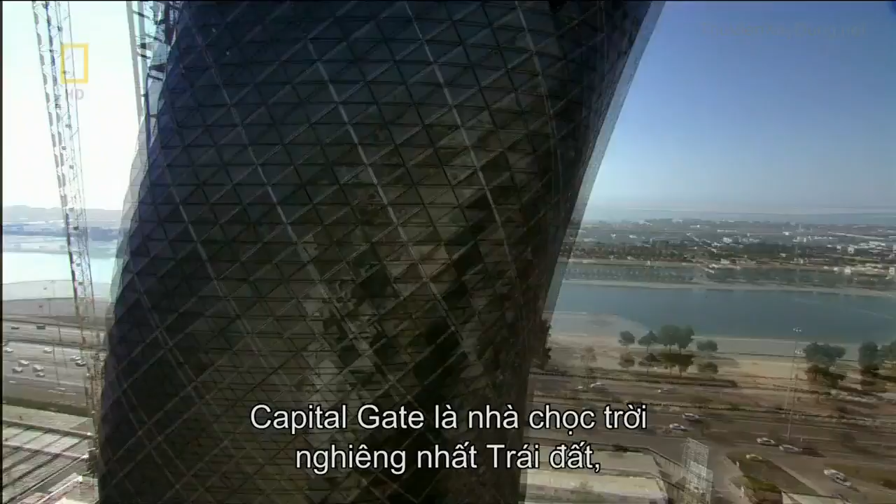Dubai is famous for its audacious engineering projects. But now, its neighboring city, Abu Dhabi, could surpass them all. This is Capital Gate, the most inclined skyscraper on the planet. It defies gravity, leaning at almost 5 times more than Italy's Leaning Tower of Pisa. To make it stand up, it'll take some extraordinary engineering that could rewrite the skyscraper rulebook.

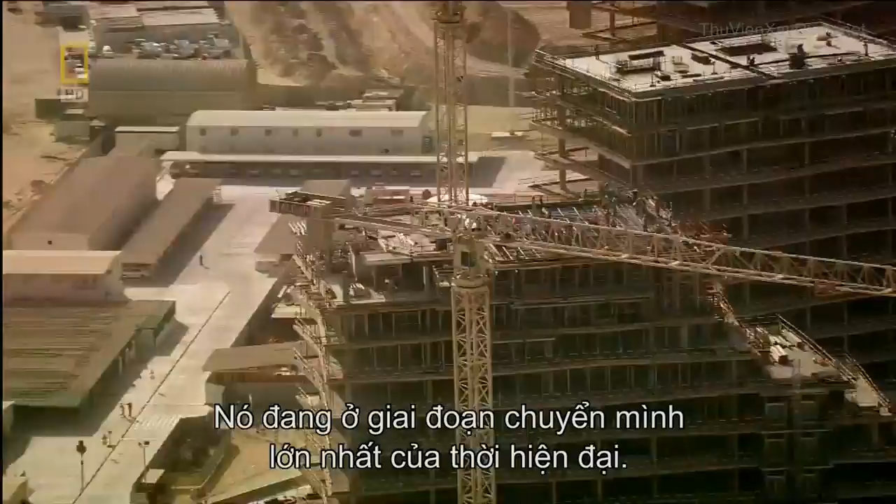Situated on the edge of the Persian Gulf lies the Sheikhdom of Abu Dhabi. It's the largest and richest of 7 states that unified in 1971 to form the United Arab Emirates. Abu Dhabi is undergoing one of the biggest makeovers of modern times. Its ruler, Sheikh Khalifa bin Zayed Al Nahyan, wants to join the City Super League. And he's spending over $200 billion to transform his capital into a world-class business and tourist destination.

He's already spent a reputed $3 billion creating the most expensive hotel ever built. The Emirates Palace boasts 114 gold domes and is the height of luxury, where rooms cost up to $12,000 a night. And that's not all. He's built one of the largest and most opulent mosques on earth. Capable of accommodating 40,000 worshippers, the Grand Mosque boasts the largest carpet on the planet and the world's biggest gem-encrusted chandelier. But even these structures have not quenched his thirst for the extraordinary.

Now, the Sheikh wants a building so spectacular it will instantly become an international symbol for Abu Dhabi. The man appointed with the task of delivering this architectural icon is the Sheikh's cousin, His Highness Sheikh Sultan bin Tahnoon Al Nahyan. Architecturally, it will be a unique building, positioning Abu Dhabi as one of the cultural hubs around the world. And architecture is part of that overall inspiration and art.

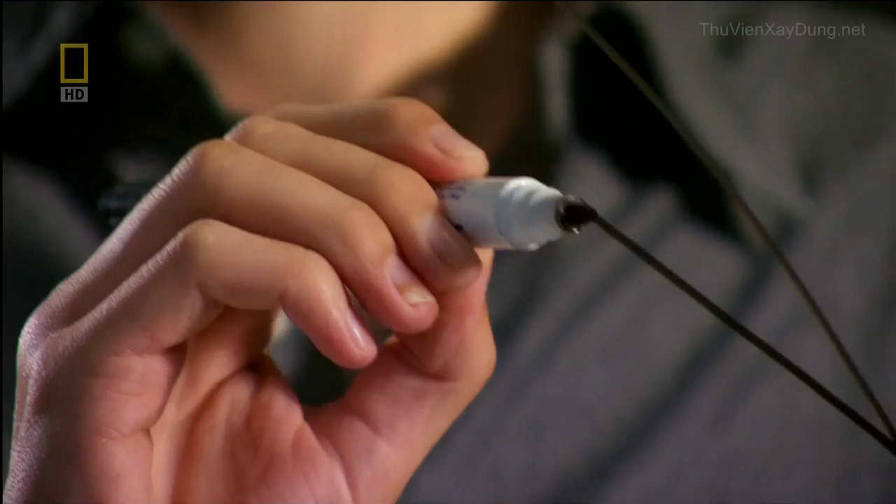The architects look for inspiration in Abu Dhabi's landscape. They find it in the wind-swept dunes and the rolling waves of the Persian Gulf. We took this idea of wind and water, which are both dynamic, fluid type of rhythms of nature, and we said, how can we capture those in time? As a result, you get a much smoother face. I was really very happy when we first saw it, because with such a building, you get the first impression from the first few seconds.

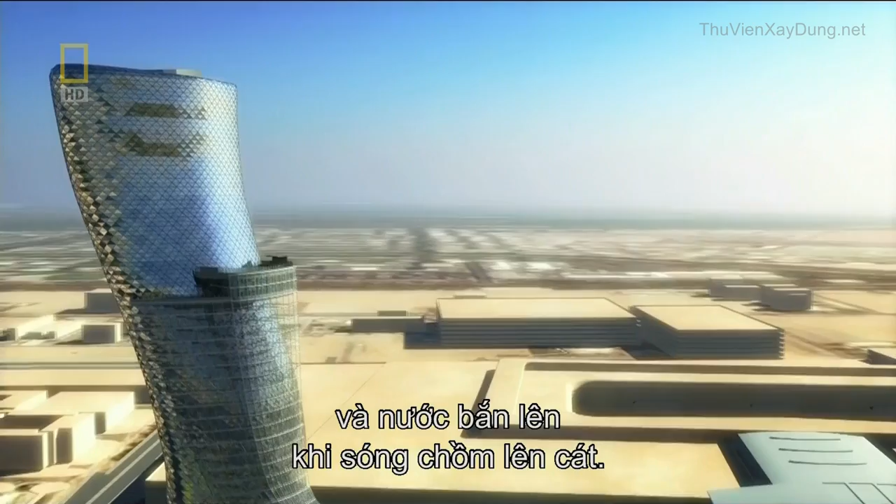The team come up with an extraordinary design. A tower that spirals out of the ground to 160 meters, inspired by a desert whirlwind and the splash of a wave rising over the sand. This gravity-defying skyscraper tilts almost 5 times more than Italy's Leaning Tower of Pisa. No single angle of this tower is the same as another. It's a structure guaranteed to amaze.

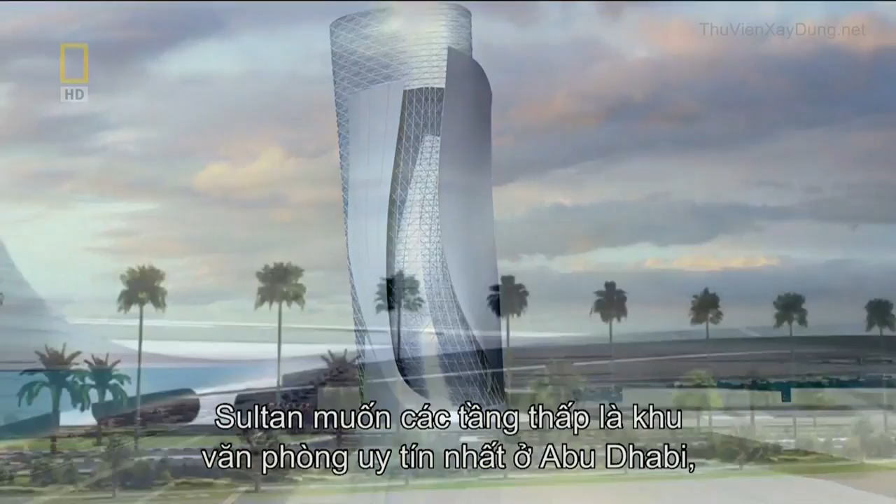We really wanted this to happen. They could see a vision suddenly. They could see something that would stand for them. Then there was no stopping us. Sheikh Sultan wants the lower floors to become the most prestigious office address in Abu Dhabi, with the top 18 levels assigned as a 5-star hotel fit for royalty.

But for maximum impact, this landmark skyscraper also needs a prestigious location. The Sheikh decides the tower will stand next to a monument of national importance, the Grandstand. Built by his uncle and founding father of the United Arab Emirates, Sheikh Zayed, it's used to this day for national celebrations. This monument and the skyscraper will link Abu Dhabi's future with its past.

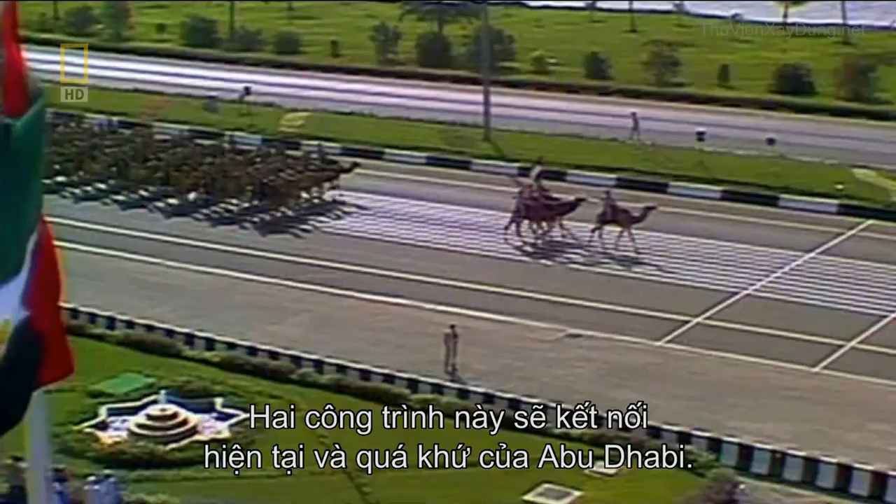Over the past 50 years, this land has experienced extreme change like no other. The discovery of huge oil reserves in 1958 set the wheels of progress in motion. Abu Dhabi's ruler, Sheikh Zayed, had a vision to unify the sheikhdoms and secure their financial future from Western dominance. He then set about using his black gold to create a city that rose out of the desert.

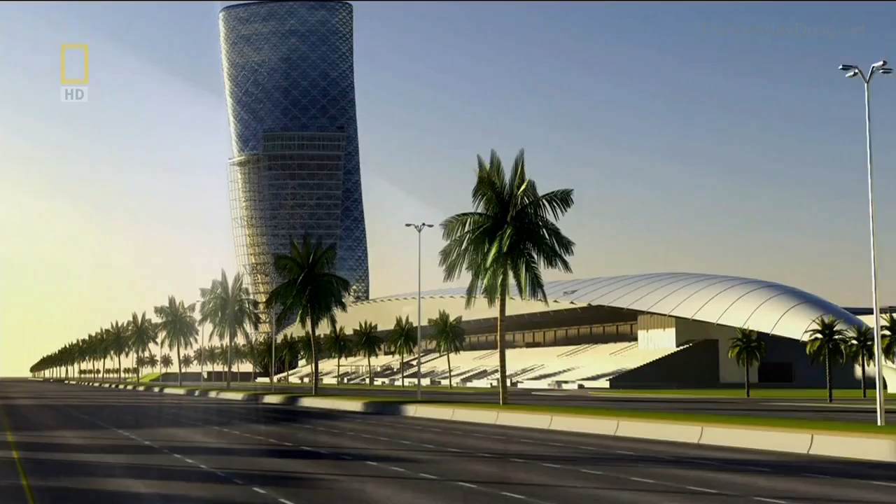Today, Zayed's legacy is all around, and now his son wants to leave one of his own. To transform Abu Dhabi once again, but this time to put it on the world map. Sheikh Khalifa plans a new $2 billion business district called the Capital Center, situated alongside the Middle East's largest business hub, the Abu Dhabi National Exhibition Center. It's the ideal location for an architectural icon. And inspired by its location, the new tower is named Capital Gate.

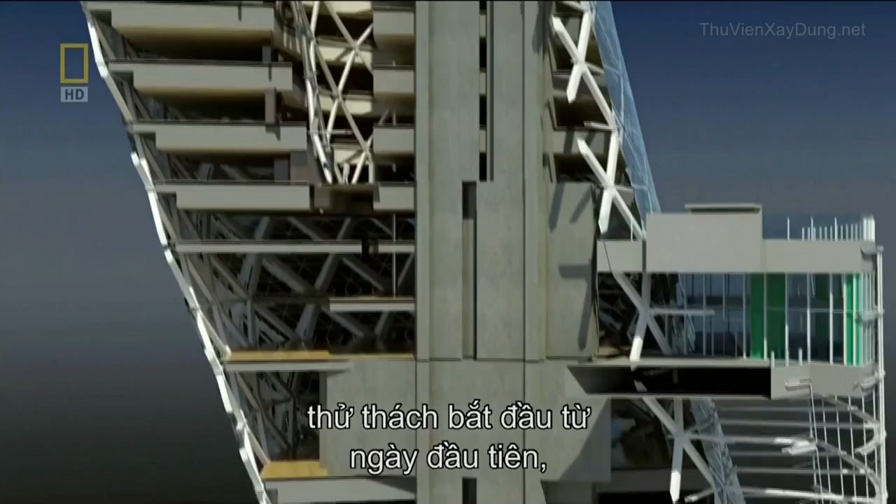Now, the idea must make the leap from the drawing board to the construction site. The only problem is, no one has ever attempted a skyscraper like this before. Everyone realized that this is a crazy structure to build, and how are we going to build it? To make Capital Gate's gravity-defying design a reality, it'll take some extraordinary engineering, and the challenge begins on day one. Its top floors overhang its base by 33 meters, creating huge forces that want to rip the building's foundations out of the ground.

At the construction site, project architect Tony Archibald is daunted by the task ahead. When I first joined the job, I was shown the drawings, and I kind of did a double take, and I wasn't quite sure that I got the correct understanding of the project, and it took me a few moments before I realized what we were about to undertake.

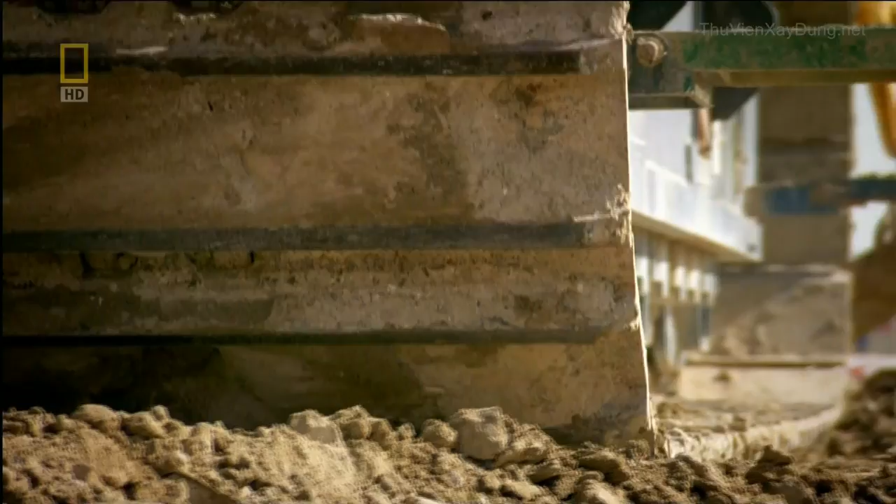Keeping Capital Gate upright is a huge engineering challenge. There isn't just one solution. To overcome the forces of gravity, it will take a whole range of pioneering techniques. But the task starts with the foundations, deep underground. On one side of the building, the weight is going down into the ground. On the other side, it's being lifted out of the ground. And that's due to the large overhang that we're having to deal with.

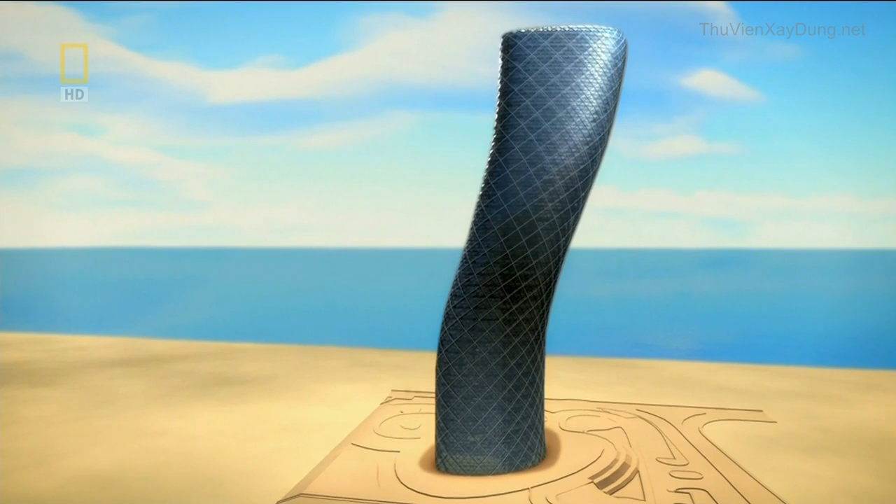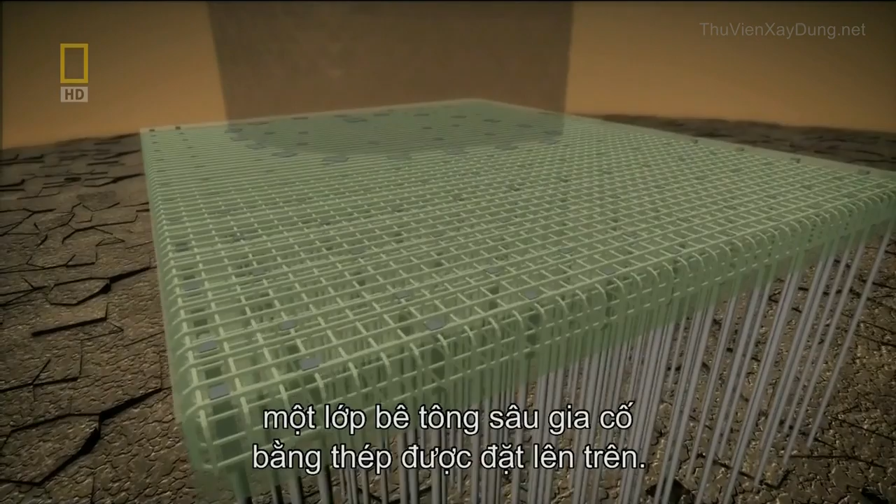The solution requires almost 400 concrete piles that work in 2 different ways. On the leaning side, half of the piles push the overhang's forces into the ground. On the opposite side, the remaining piles anchor deeper into the bedrock. They resist the stretching forces, trying to wrench the building out of the ground. Finally, to evenly distribute Capital Gate's forces into the piles, a deep concrete slab reinforced with steel is laid on top. What the foundations taught us is that every single aspect of this building has to be custom engineered.

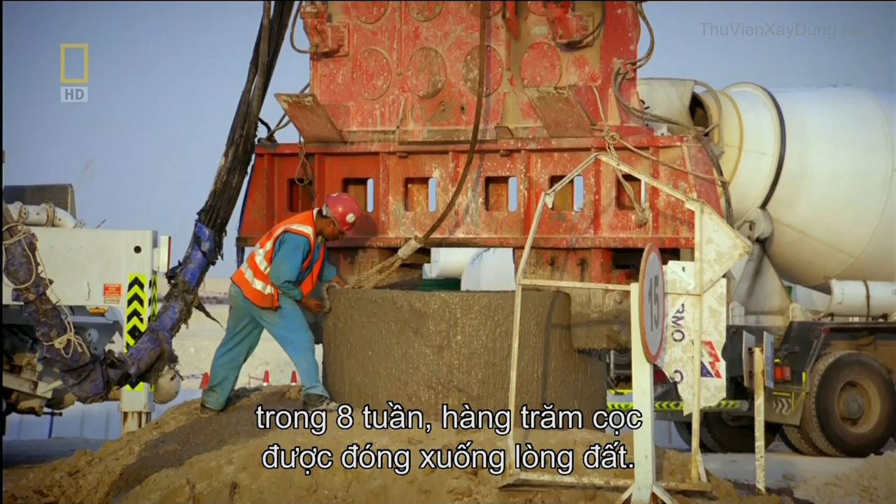Excavators dig out a colossal 6,000 cubic meters of sand. And over 8 weeks, hundreds of piles are driven into the ground. We had an awful lot of piles to put in very close proximity. It was a real difficult challenge. There can be no let-up on this schedule. Sheikh Sultan wants Capital Gate complete by an impossibly tight deadline.

In less than 2 years' time, Abu Dhabi will host the World Future Energy Summit. Over 3,000 delegates from 50 countries and the world's press will convene at the neighboring Abu Dhabi National Exhibition Centre. It's the perfect opportunity to showcase Capital Gate and prove Abu Dhabi is at the forefront of innovation. They'd have to finish by then. But this gives the team just 24 months to design and build a unique skyscraper.

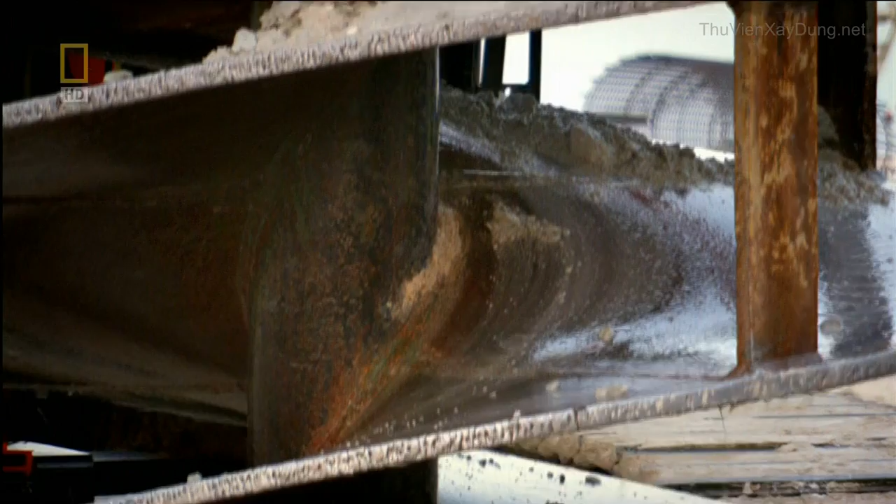With the foundations finished, building above ground can begin. But because of the dramatic lean, it will have to be constructed in a very different way to a conventional skyscraper. We realised once we'd done the foundations that this was going to be the first of many difficult problems. A normal skyscraper requires a solid core to hold it upright. But Capital Gate's curves will just crack and topple a standard core. Engineers must discard conventional thinking and devise a way to defy gravity.

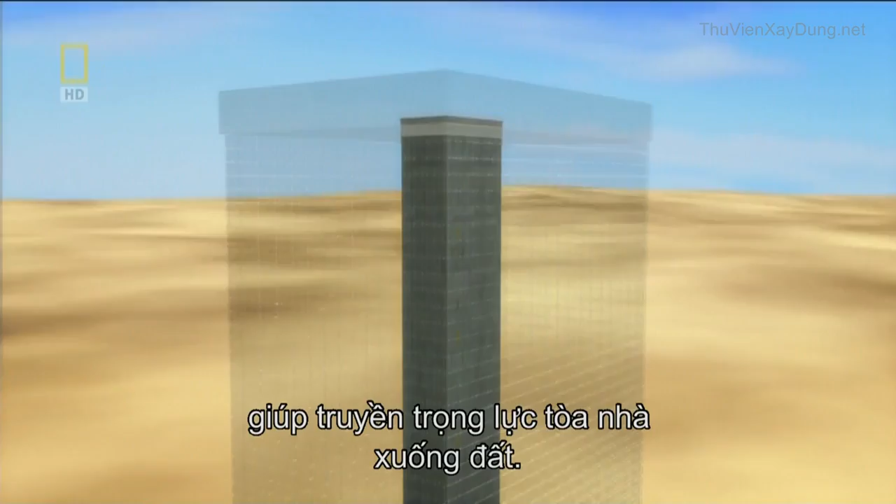Inspired by the nearby desert landscape and its wind-shaped dunes, architects have designed a curved leaning tower. But it'll take some audacious engineering to stop Capital Gate from falling over. Normal skyscrapers are built around a straight vertical core, which helps to channel the building's weight into the ground. There's so much overhang on this building that a conventional core, there was no way it was going to work. You just can't build a straight core. It's just not strong enough. Capital Gate's design would cause a conventional core to bend dangerously. The pull of the massive overhang wants to stretch the core on one side, causing the concrete to tear apart.

Structural engineer Mona Vassi knows it's a serious problem that must be solved. When I saw this one, I thought it's impossible, it's not going to work. It's just some sketch, somebody left it somewhere. But I always think that for the architects, it's easier for them to just draw something, but it's not easy for us to fulfill or satisfy their need.

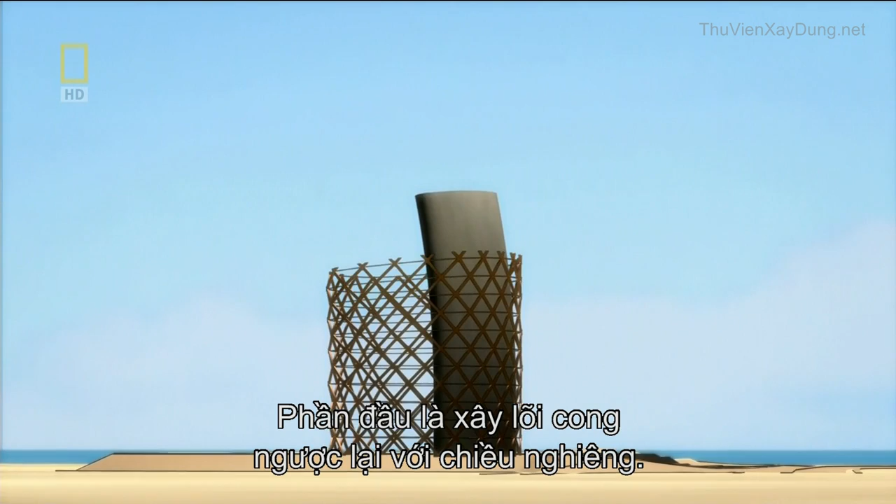The engineers developed 2 groundbreaking solutions. The first part of their plan is to build the core with a curve, bending in the opposite direction to the building's lean. As the structure grows, its weight pulls the core straight. In total, it shifts 350 millimeters, and the effect is significant. The concrete that would have been stretched by the overhang's pull will now be compressed and strengthened. You build it bent, and then as you add the slabs to the upper levels, it pulls it back into vertical. So basically that whole vertical core is in compression, and that gives it immense strength.

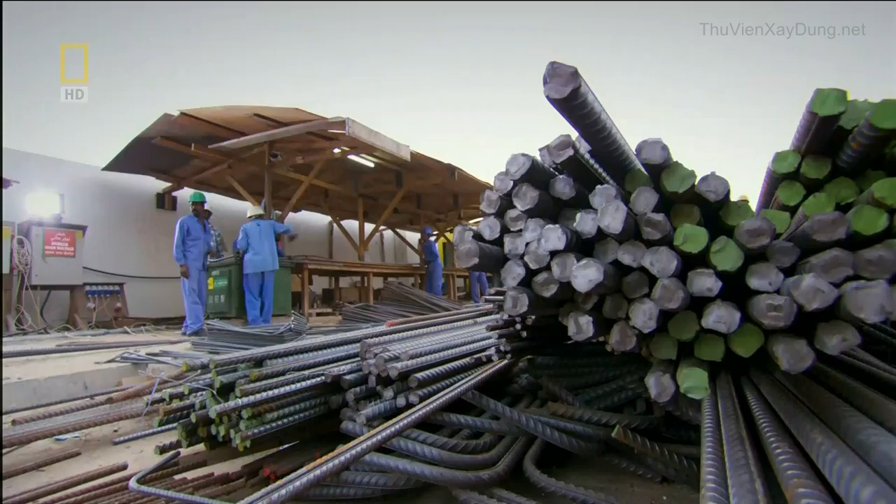The core grows 4 meters a week, and construction manager Les Fairchild is in charge of building it. This is probably the most complex core that I've come across. It's built at an angle, and effectively the core holds the whole building up.

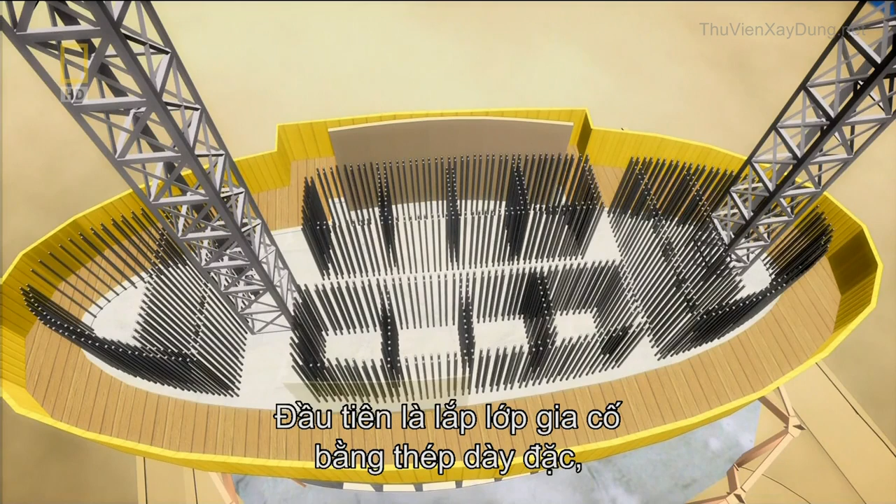The core is built using a technique called jump forming. First, a dense mesh of steel reinforcement is assembled. A mold then closes around the steel to form the shape of the core. The steel mesh is then filled with concrete. Then the mold or form can climb up the core wall for the process to start all over again.

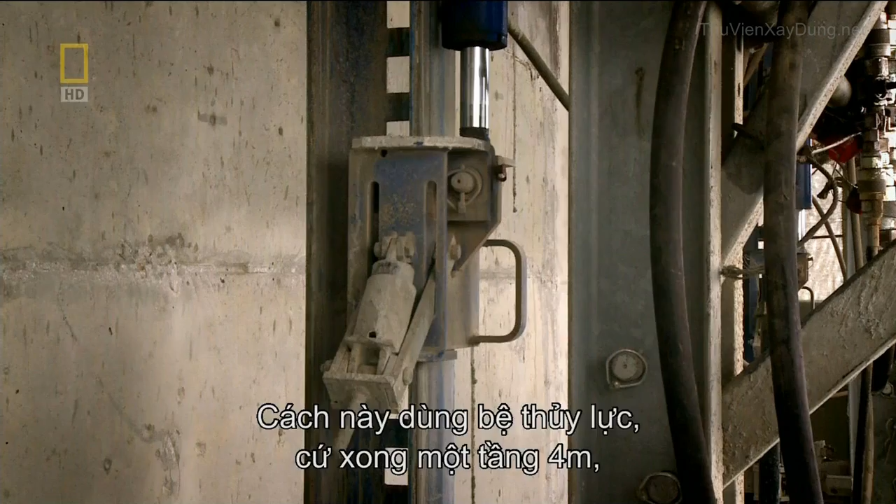Jump form is a hydraulic platform. Once we've cast each 4-metre level, we simply attach it to some runners and we jump it hydraulically up to the next level. The core will be strengthened as it straightens. But for the core to carry extreme loads, the concrete must be reinforced using steel rods called rebar.

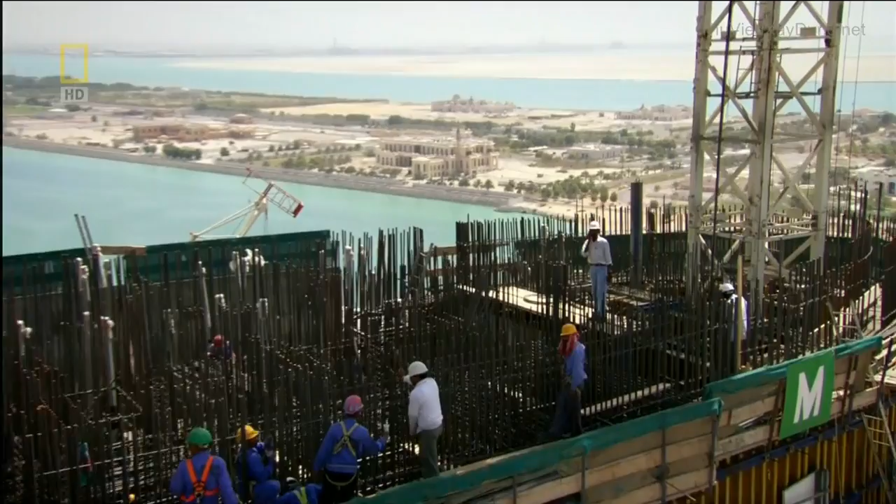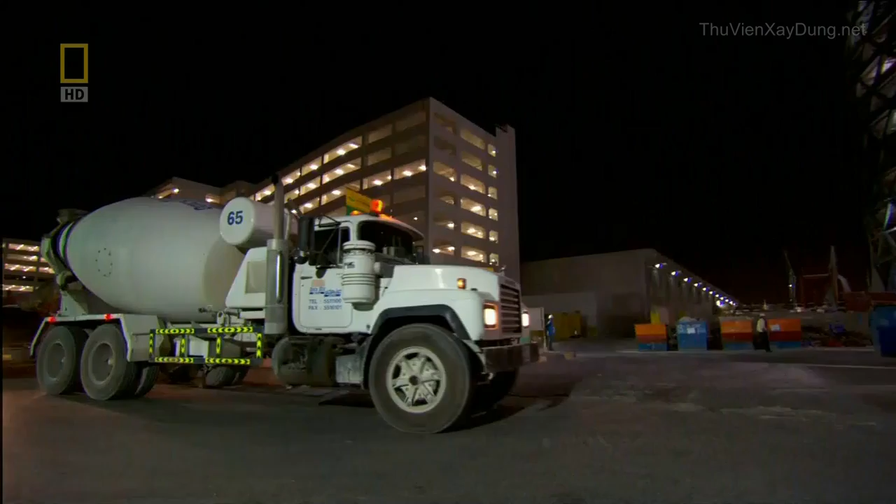The rebar is installed during the daytime, but temperatures of up to 50 degrees Celsius and concrete don't mix. It dries too fast and could crack. To set at the right speed, the concrete has to be poured during the cool of the night. As the core grows higher, the liquid concrete has to be pumped over longer and longer distances. So the consistency of every batch is first checked in a slump test to ensure it won't block the pipes.

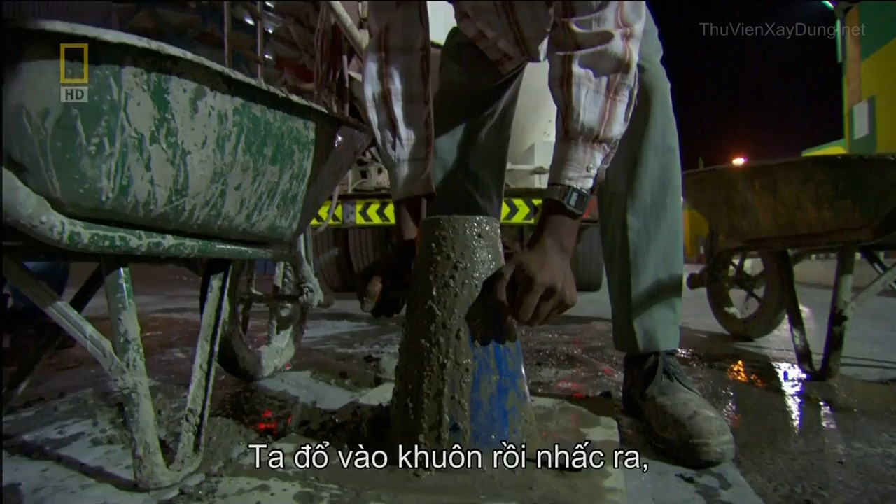When you first see it coming out the wagon, you can usually tell whether it's a tight mix or whether it's a loose mix, and that's what we're testing for really in the slump test. We simply make a cone, lift the cone off, and depending on how much it reduces in height, tells you exactly what the slump is. The one we just witnessed is 215 millimetres, which is within the specification, so that's good to go.

Whilst the truck drives to the pump, Fairchild needs to get onto the core. He can take the stairs, but 90 metres up is a long climb. He knows a much faster way. Crane lift.

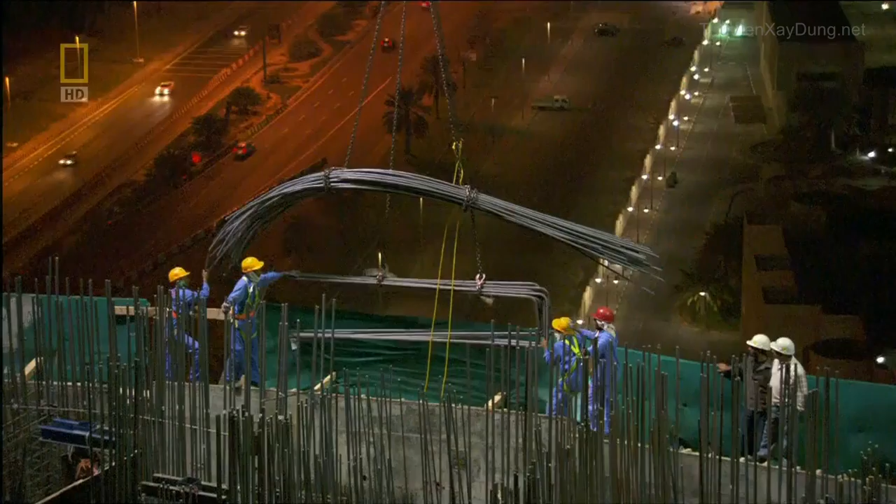It's going fairly well. We've had a nice continuous supply of concrete and we're now pumping it up to the upper levels of the building. And the lads are just steadily working away. They actually work from one side to the other in metre deep layers, so they're doing everything right. It's always exciting when we pour concrete. It means it's another achievement really. We're going up another level.

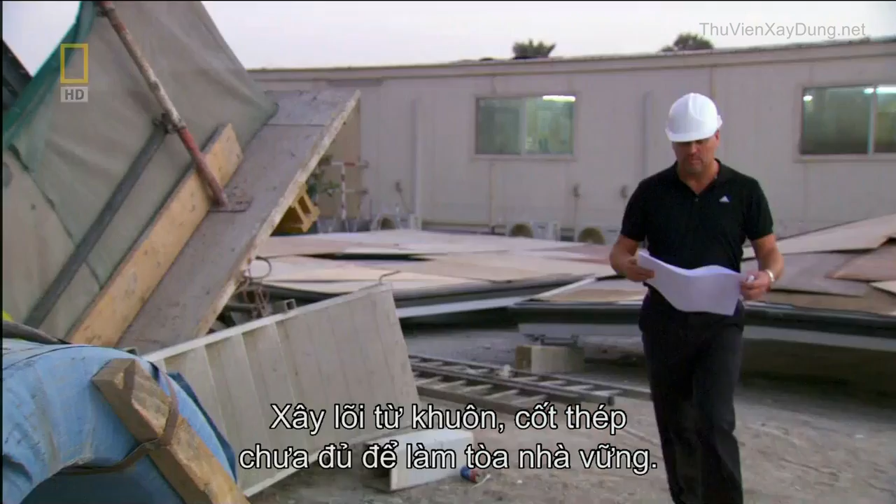But building the core out of alignment and packing it with rebar still isn't enough to stop gravity toppling Capital Gate. What we came up with is a post-tensioning solution where we introduced much more reinforcement into the core wall and then used a tensioning process. Basically that was done by introducing high tensile strands to the centre of the walls. When we reached the designated height, we simply applied tension.

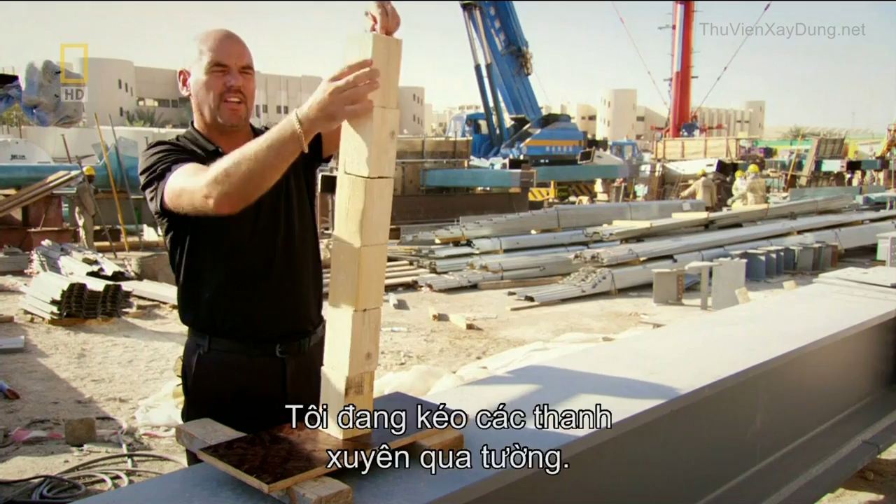We're actually stretching the tendons that fall through the wall and we're actually pulling them tight, and that's done by a tensioning machine. So effectively, when the tension is complete and the load was applied, the core would stay intact and the additional reinforcement would prevent it from falling over.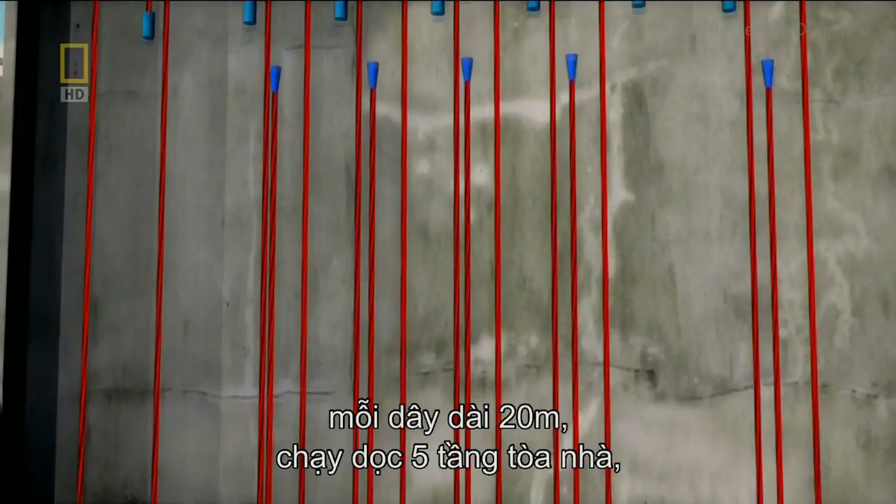To post-tension the core, 146 steel tendons are threaded vertically through the concrete. Each tendon is 20 metres long and runs through 5 floors of the building, overlapping each other for maximum strength. When the tendons are stretched, the stress counteracts the pulling force created by the massive overhang, stopping the concrete from tearing apart.

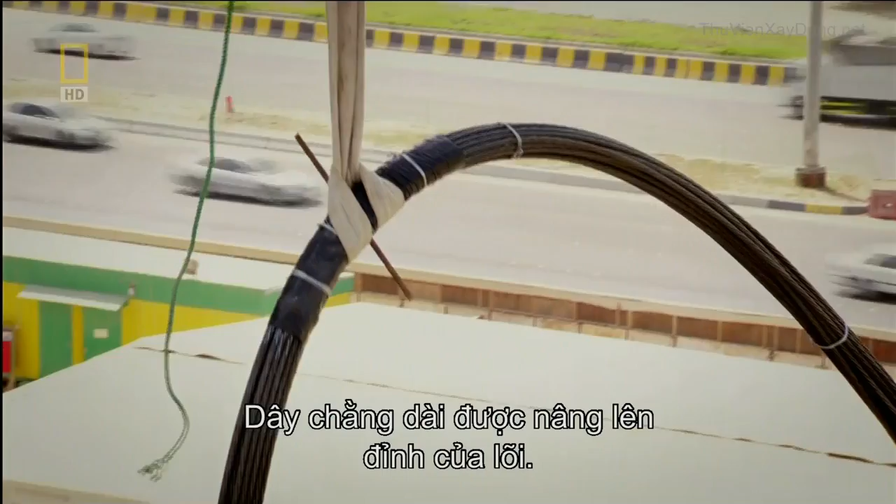On site, the team are post-tensioning the core. But no one has ever attempted this vertically in a skyscraper. The long tendon is lifted to the top of the core. The team used the steel tendon's weight to force it through a duct already cast through the core. Once the tendon is in position, the team lock off both ends, ready to tension its individual strands.

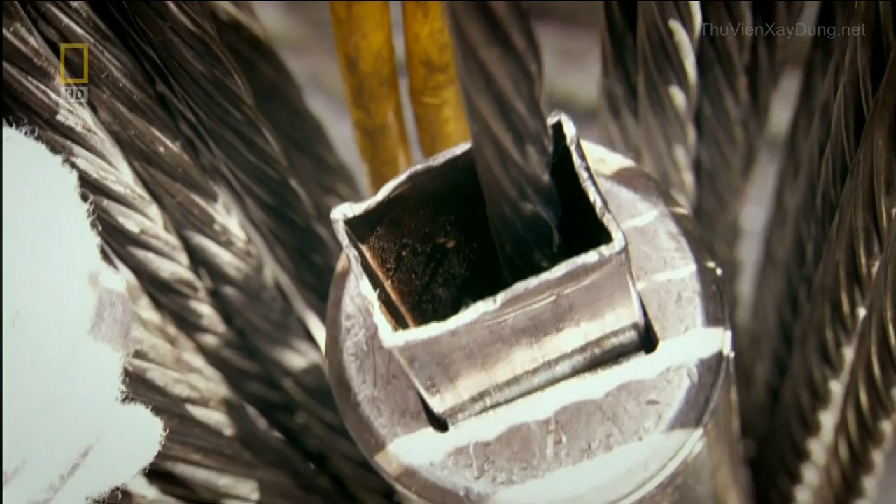A pneumatic jack clamps around one strand at a time and stretches it. It's equivalent to about 5 family cars pulling on one end of the rope. With the steel tendon now stretched to the right stress level, concrete pouring can continue upwards. The quantity of cable that's been used is approximately 120 tons and 120,000 meters in length. It's about 44 times the Golden Gate Bridge. This process is repeated over and over and means the core should withstand the huge loads generated by Capital Gate's extreme overhang.

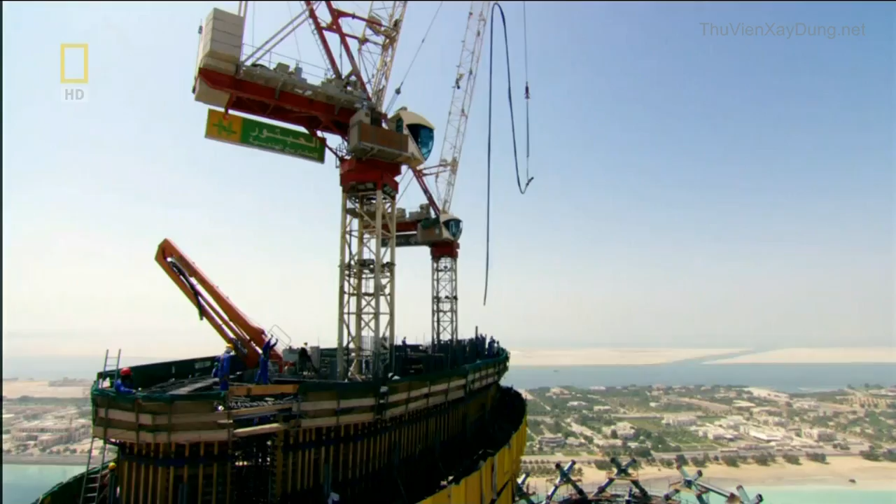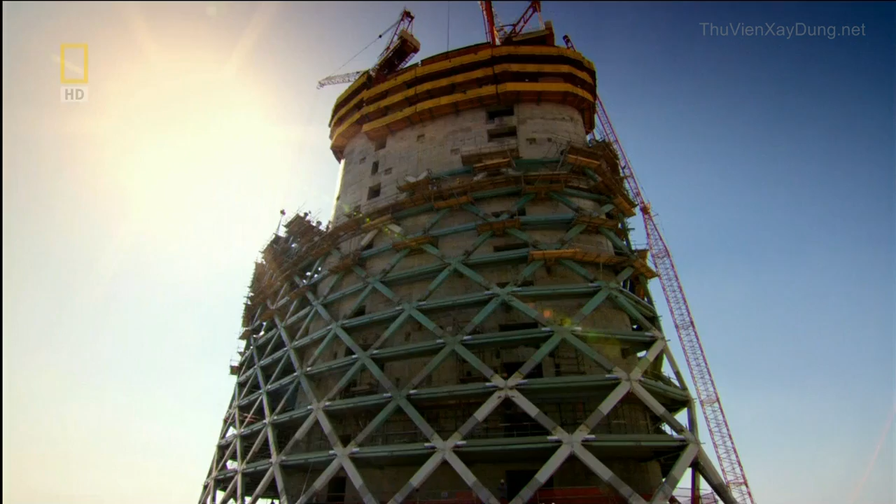But now, an even greater challenge must be tackled. The building's twisting, leaning design must somehow be turned from theory into reality. And once again, it'll mean bending the rules of architecture. To create Abu Dhabi's architectural icon, Capital Gate needs an exterior curved leaning frame. But once again, the building's extreme tilt creates a problem.

The shape of the building with this very pronounced overhang meant that traditional skyscraper building solutions just weren't going to work. There was no way. The building design requires it to be thin to maximize floor space and allow for huge panoramic windows. Irfan Ahmed is one of the engineers who has to find a solution. For structural engineers, always it's challenging to accept the architectural requirement, you know. They always want thinner and thinner and thinner.

Surprisingly, the humble egg could help with this engineering dilemma. It is essentially a skin of structure around the outside of the building, not unlike an egg. An egg can withstand huge loads because it evenly distributes forces down through its shell, which means the shell can be thin, creating more space inside. So it's very, very thin, it's very, very strong. If I try to crush this egg, you can see that it's actually amazingly resilient. So let's see how resilient.

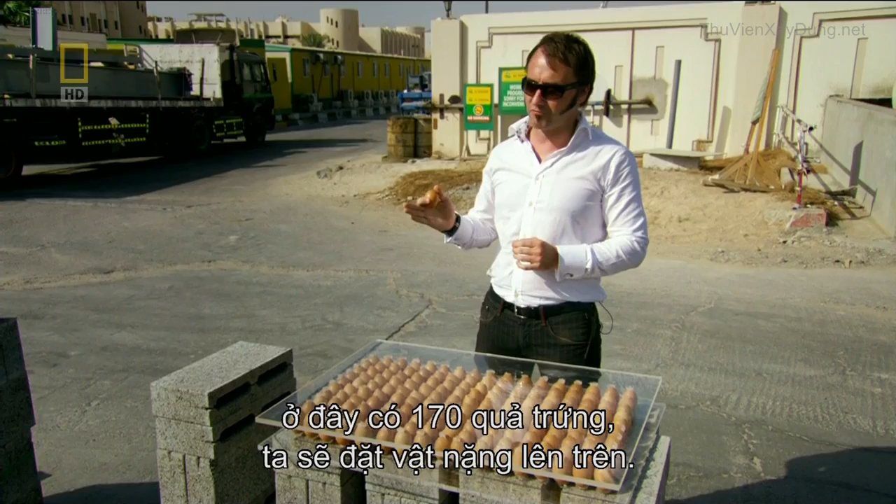Here I have 170 eggs laid out, and we're going to put load on top of these in the form of breeze blocks. Moment of truth. So far, so good. Each one of these blocks weighs 15 kilos. So we've nearly got half the weight of a car on here now, on our 170 eggs. Let's see how far we can push this.

That's 30 blocks, and I think it's about to go. It's going big time now. This is it. This is the end. No! These eggs eventually crack under the weight, but they withstood over 450 kilos, half the weight of a family car. Yeah, we used to have it all around the core.

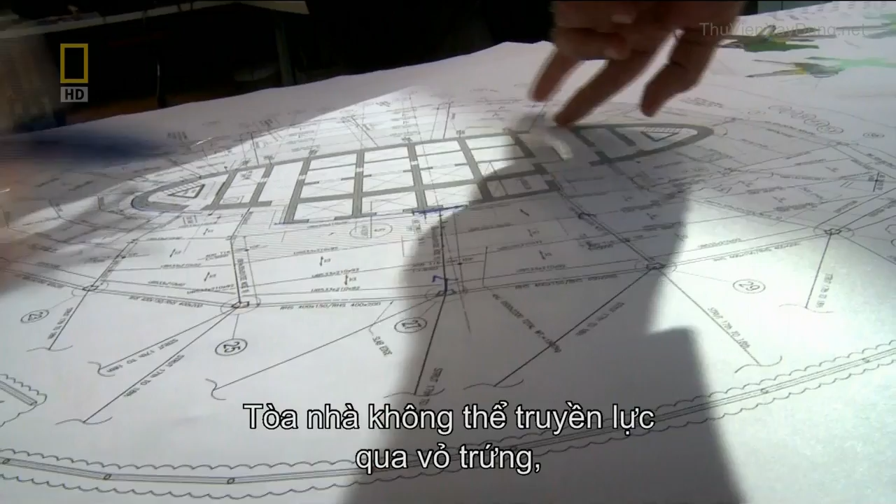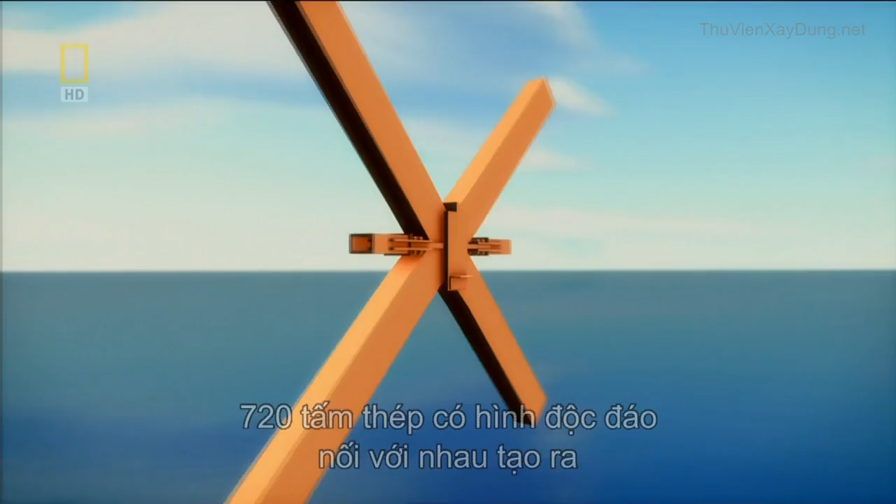Capital Gate can't channel forces with eggshell, but it can use the principle of how it works, using a diagrid. A diagrid is a giant mesh of steel that wraps around the core. Steel beams connect to a node or joint to form a cruciform section. 720 uniquely shaped sections link together to form the thin but immensely strong diagrid. Working together, these cruciforms equally distribute the forces down the outside of the building. The way it does that is by making a uniform net, so that the forces are very evenly distributed, and that means that we can get away with slenderer sections.

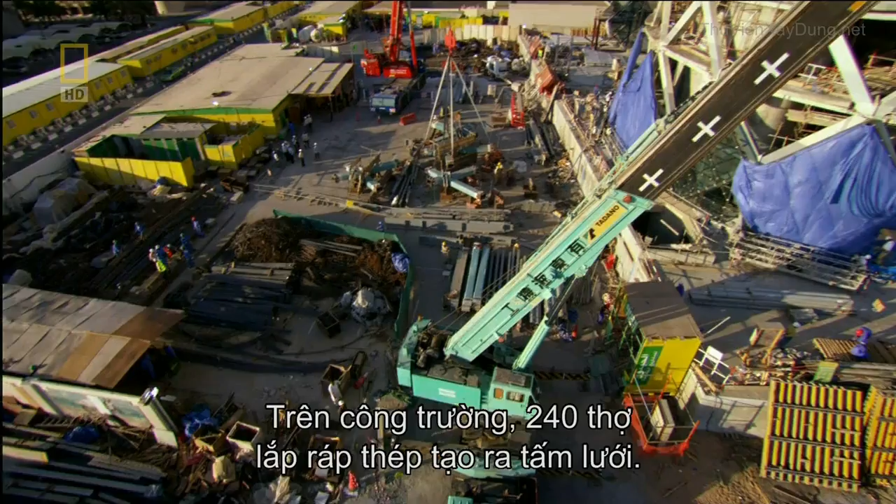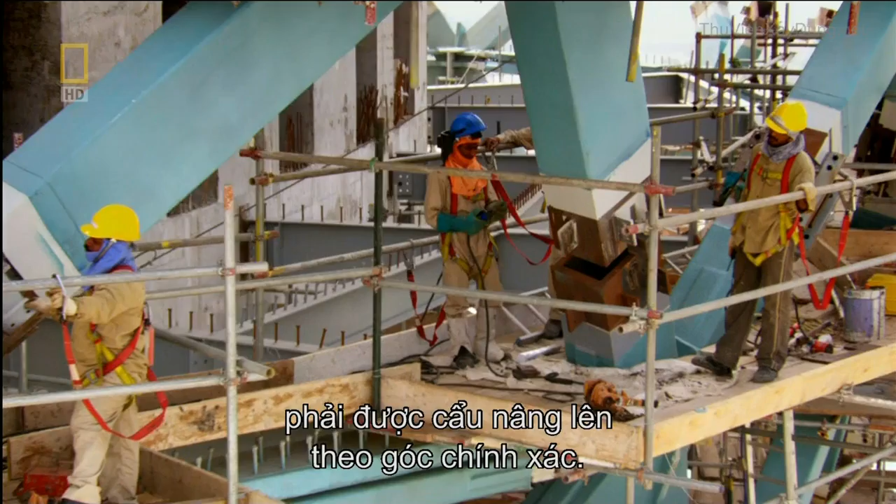On site, a team of 240 steel fabricators assemble the diagrid. They've built the easier straight part of Capital Gate's base, but now the structure is starting to lean, making installation even more challenging. Each cruciform, weighing up to 16 tons, has a unique geometry and must be crane lifted at a precise angle. If the diagrid is not assembled with millimeter accuracy, the mesh will not channel the loads and the structure could be weakened.

The engineers must communicate closely with the expert steel fabricators. They design and manufacture the diagrid 150 kilometers away in the neighboring emirate, Sharjah. Here, cutting-edge construction is the norm. They've built one of Malaysia's Petronas Towers and Dubai's iconic skyscrapers, the Burj Al Arab and the Burj Khalifa. But Capital Gate's revolutionary design pushes even these experts to the limit.

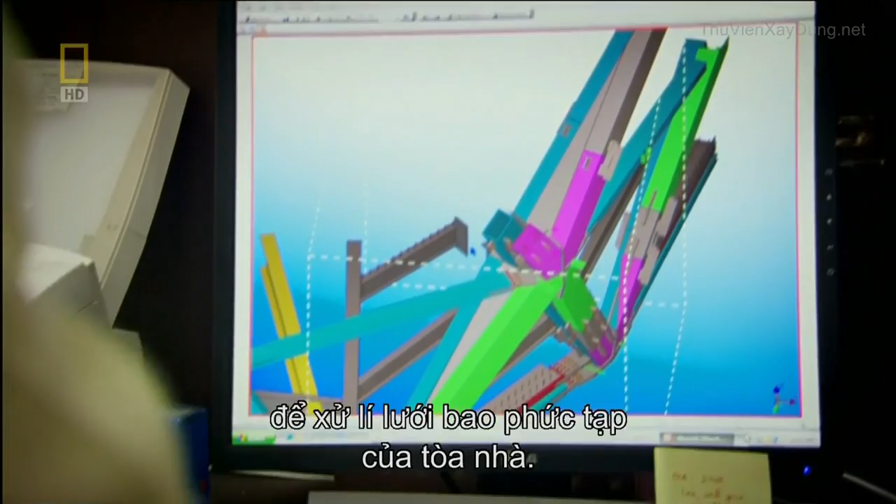On the planning floor, project engineer P. Baskaran and his team need bespoke 3D software to tackle the building's highly complex diagrid. The 3D modeling is done, and any unforeseen criticalities will be very clearly identified in the 3D model. Each one of the 720 cruciforms is precision engineered, not only to channel huge forces, but to connect with millimeter accuracy to the neighboring cruciforms and the glass facade. But to measure their exact angles, the team used some old-school technology: chalk. It might look unsophisticated, but it's highly accurate, ensuring all the elements will join together.

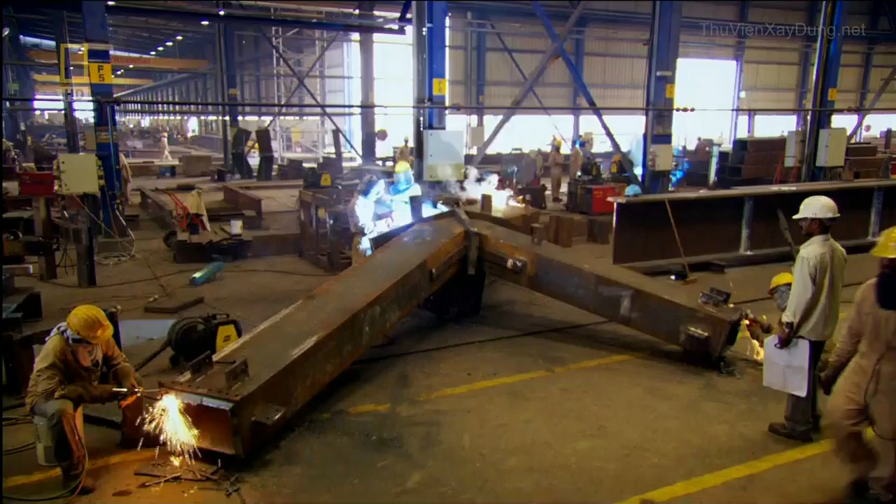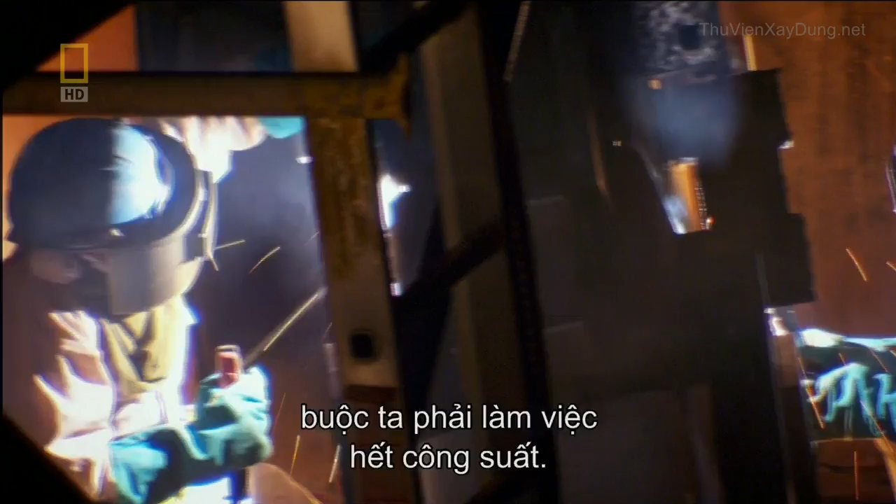To keep up with construction, the factory must produce 18 cruciforms every week. Constructing such a huge building, and a critical building within the short span, without working 24 hours, it is absolutely not going to happen. As the skyscraper reaches new heights, the long hours start to pay off. This design pushes the diagrid technology to its absolute limit, and in fact far beyond what's ever been achieved so far. Even in your dreams, you're thinking about this project. So once you see the structure coming up, you forget all the long hours you spend and all the sleepless nights.

A colossus is fast emerging from the Abu Dhabi sands. Now, this leaning tower must be clad with a glass facade. And as always with this gravity-defying structure, it's going to require some revolutionary engineering.

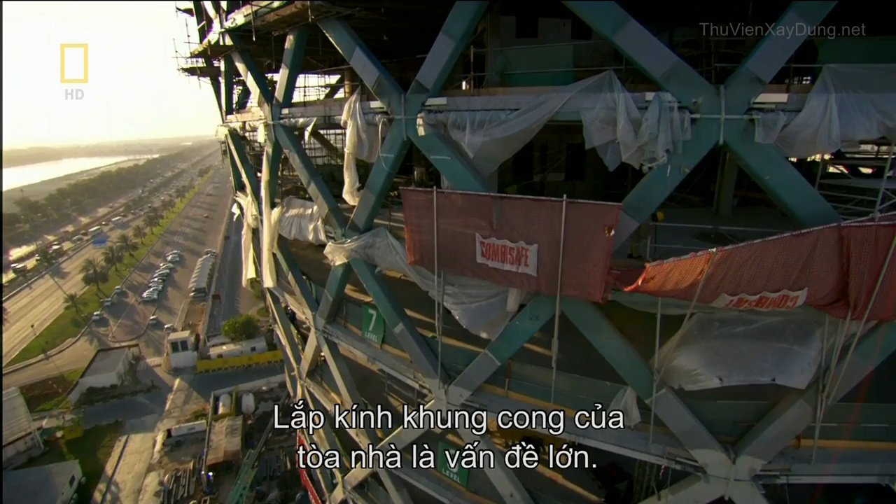Glazing Capital Gate's leaning curved frame is a major problem. Covering its unusual contours with curved glass will blow the budget. So the skyscraper's curves must somehow be clad using cost-effective flat glass panes. Fortunately, ancient Greek geometry can help.

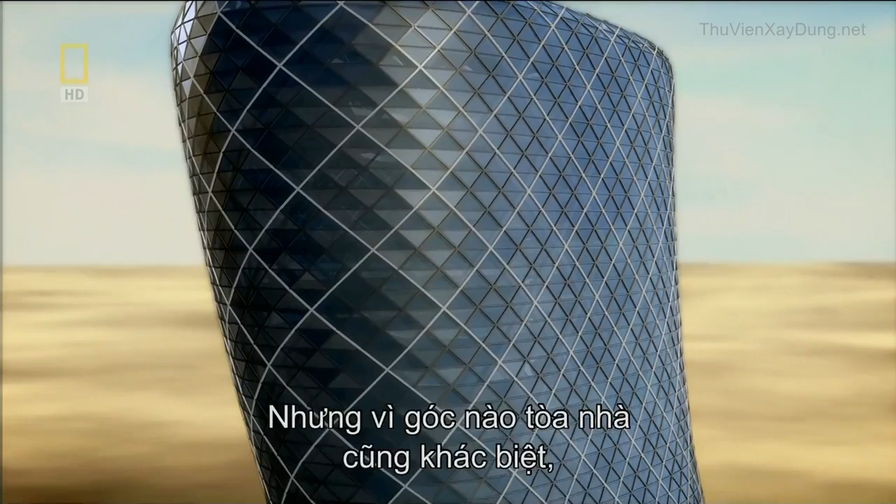Because you've got a complex shape, it's an organic shape, it's a curved shape, the only way to model that with straight lines is to use triangles. Triangular panes can pivot in 3 directions, and when joined together can cover complex geometric surfaces. But because every angle of the building is unique, it'll take 26,000 triangular panes to form the facade.

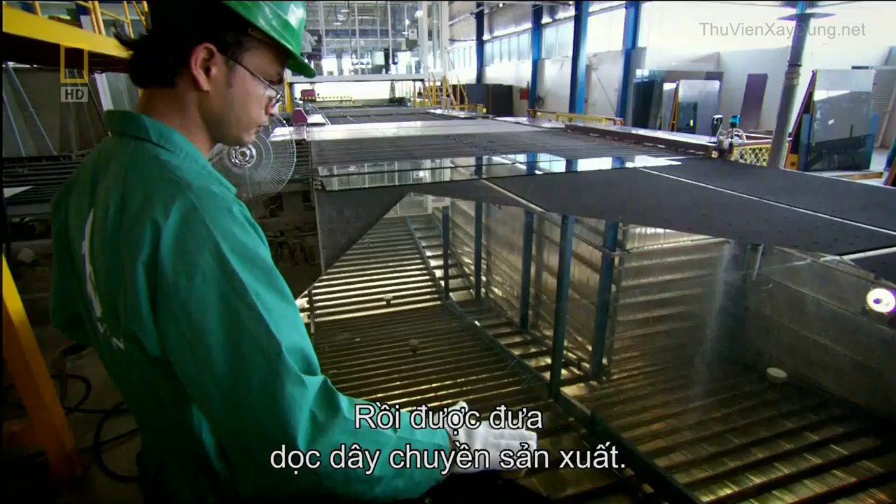With so many glass triangles to cut, the local glass factory springs into action. Each pane is scored by an automated diamond cutter to an exact pattern. The triangles are then sent along the production line. The team is under constant pressure to deliver enough glass to the site.

Hey, this side, 2 guys, hold it.

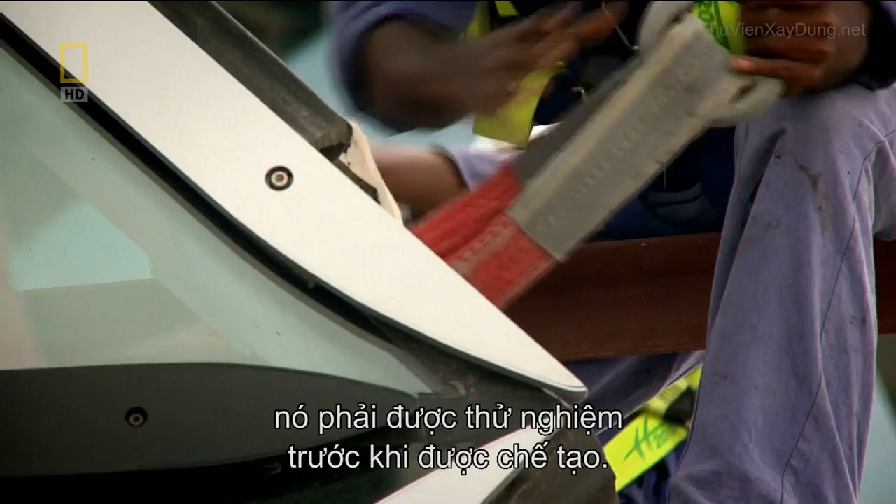After several weeks, 8 diamonds are in place and another 100 standing by. But the glass design is so unconventional, it still has to pass a number of tests to prove it's up to the job. Because we'd already started the glass installation, the results of this test were absolutely key. Each panel is stacked one upon the other. So if we'd had any kind of problem, we would have had to unstack them, which would have had disastrous consequences for the program.

This is no ordinary glass skin after all. Capital Gate's core straightens as it grows. The skyscraper will not stop moving until after completion. Normal glass facades can accommodate minute movements caused by wind and temperature changes. But to stop the glass shattering and keep the building watertight, the panels must be designed to shift by up to 20 millimeters.

The scale of that kind of movement is almost unheard of in glazing systems. It's a vast amount of movement. With glass installation ongoing, construction manager Craig Rooney needs to know the panels will perform. We don't want to get to the top, we've done it, we've installed it, we think we've done a great job, and then it all leaks.

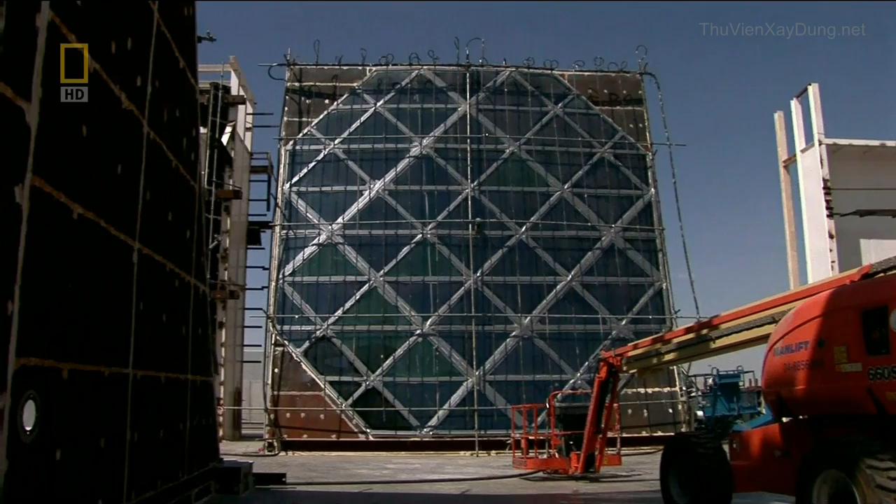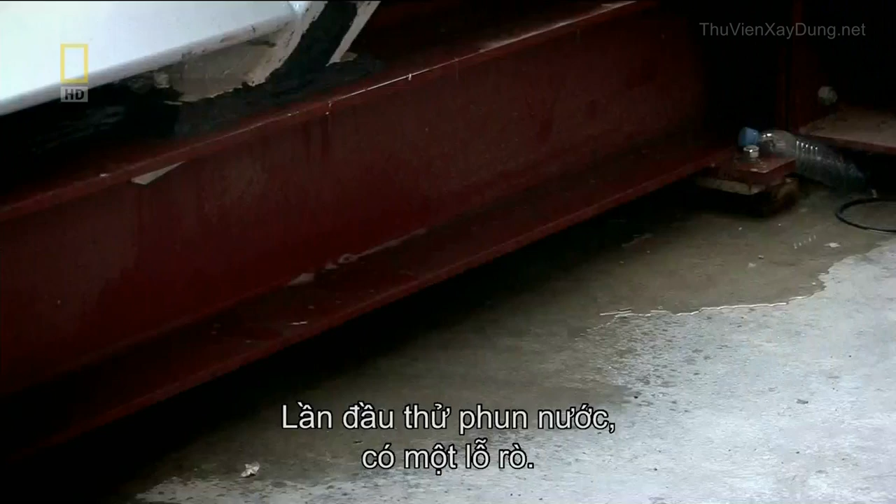The panels must be tested to the limit at a Dubai laboratory. A plane engine and many litres of water simulate worst-case scenario weather. Now the moment of truth. Any leaks could be a disaster. And it's bad news. The first time we got a full water test, we had a leak. The fact that we had a leak was devastating to the whole team and very alarming.

The diamonds connect to each other by a bespoke two-layer seal. The flexible spongy seal allows the diamonds to move and keeps water out. But if any water does seep through the outer seal, drainage tubes fitted at intervals let the water flow away. The panel has failed the test. Water has flooded inside and penetrated the inner seal. If it was a fundamental failure, we're back to the drawing board, so the cost and the budget and the programme all go completely out the window.

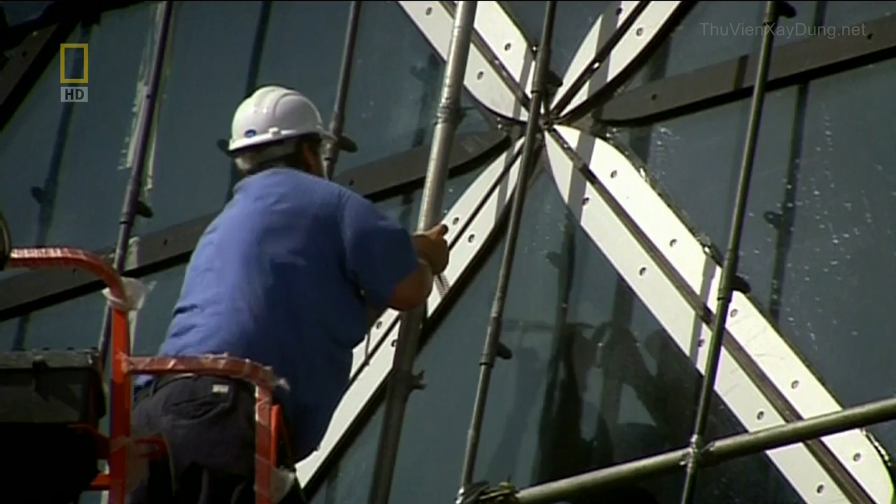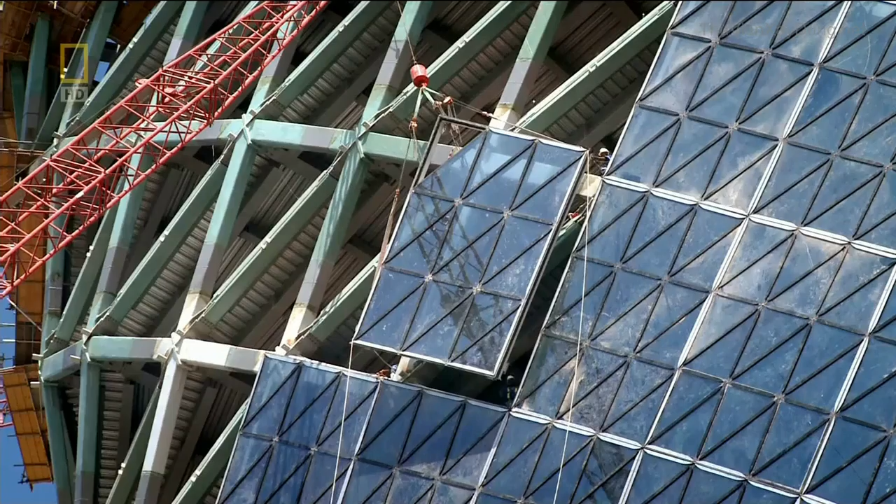The panel is examined. Answers are needed fast. Fortunately, it's not a design failure. They discover a drainage tube is only blocked with sand. The problem resolved, installation can step up a gear. But as always with this audacious building, one problem is solved and another is just around the corner.

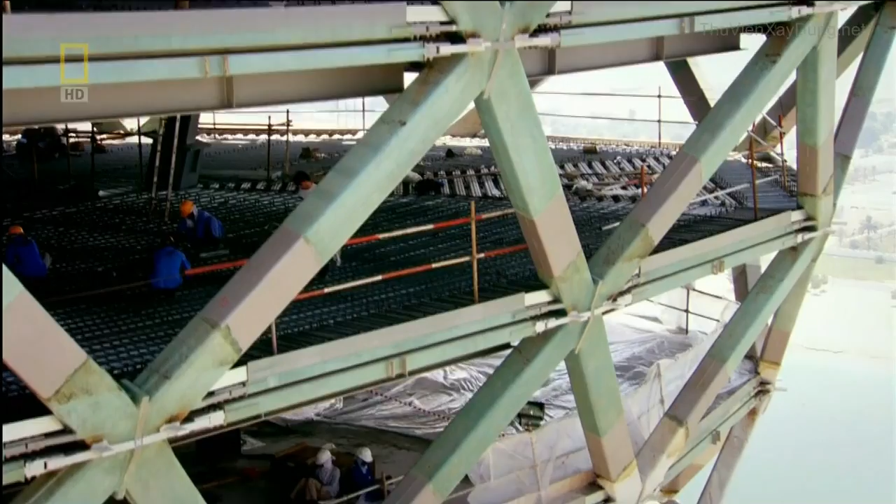To give Capital Gate's five-star hotel lobby the wow factor, architects again plan to push the design to the extreme. Now they want to build an infinity pool and a restaurant, hanging 100 meters above the ground. 18 months into the build, Capital Gate's design is about to give a new slant on high-rise living. The architects want a pool deck and restaurant suspended in the sky, but it's an engineering headache.

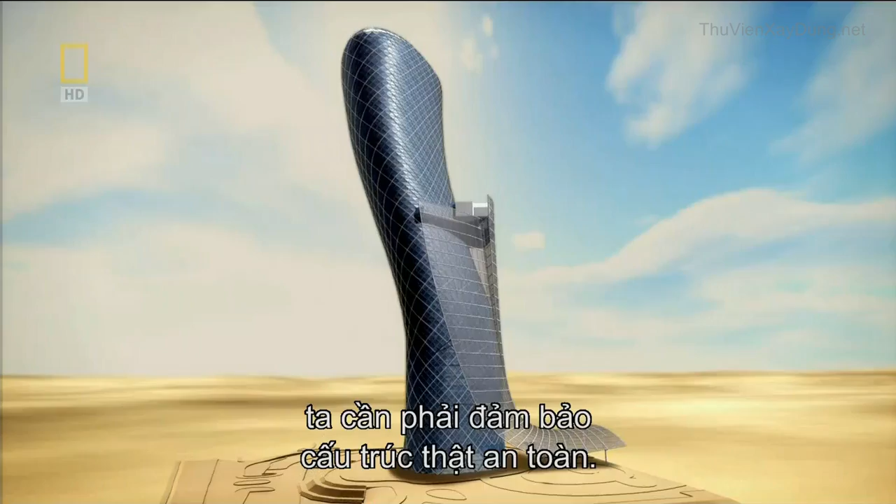There's so many requirements that architects have that really put us in so much trouble as engineers. But you want to make sure you have a safe structure. The design calls for a two-story extension, hanging without any visible support. But the pool's water alone will weigh 150 tons. The structure's huge mass means it needs reinforcement.

We needed some supports from below, otherwise there was no other solution. I don't think you can have a cantilever that huge on this building, no way. The design will only work if it's underpinned with 22 steel struts. They will carry the loads back into the building. But the struts must also look delicate to meet the architect's aesthetic demands.

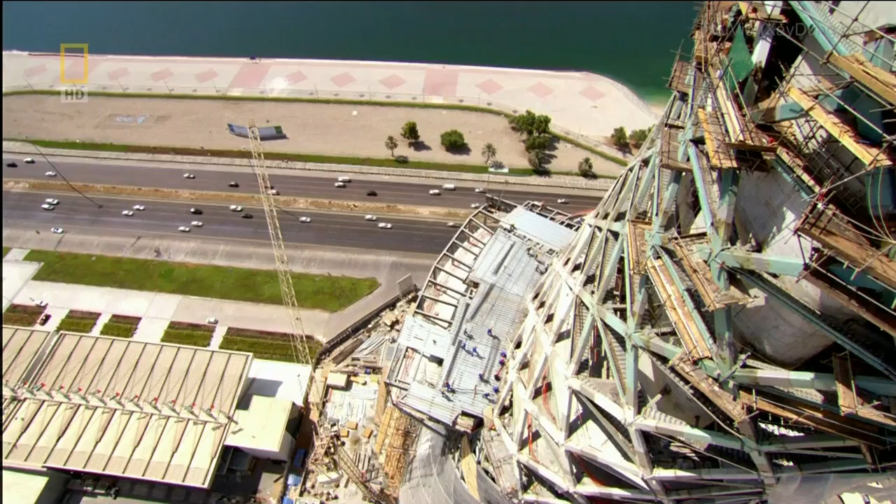On the construction site, 90 meters up, the pool and restaurant is taking shape. All of its structural elements are in position, except one. The team are raising its last 6-ton floor beam.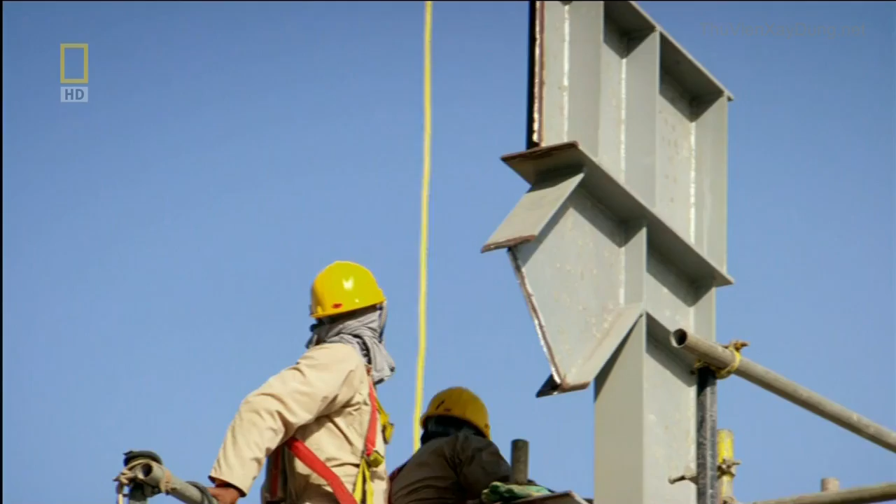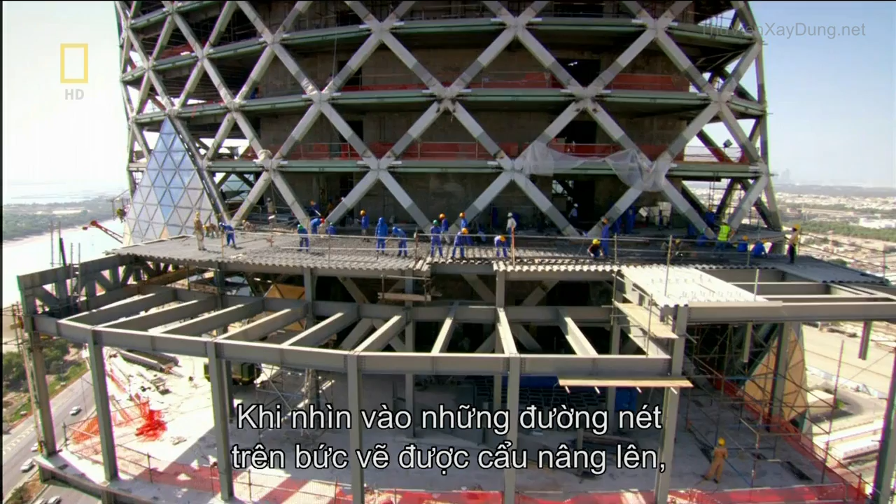It's taken many crane lifts, but one of the highest suspended swimming pools in the world has made the leap from blueprint to building. See all those lines that you just drew? They're actually drawing the same thing for you, but with a crane. But the feeling is indescribable.

And the structure's muscular struts and connections are also elegant. The idea behind these junctions is that they behave like the insects that can walk on water. They're sufficiently light that the surface tension keeps them above the water. So these little brackets dissipate the forces from all that weight.

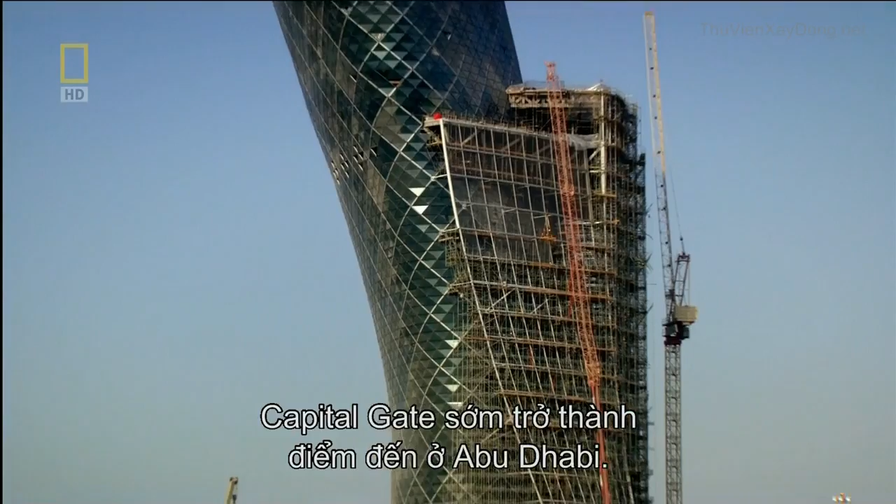Capital Gate is fast becoming an Abu Dhabi landmark. But the taller it gets, the more the weight of its upper floors is a problem. The skyscraper needs to go on a diet. And this time, the architects come up with a clever solution. The building has lots of visual surprises.

And one of the most important ones of those is the internal atrium. It's a kind of a light well that brings light from the sky deep inside the building, and it extends over half the height of the building. So it starts out very, very small at the bottom and opens out in a big funnel. This cavernous hole is good news for reducing weight and minimizes forces.

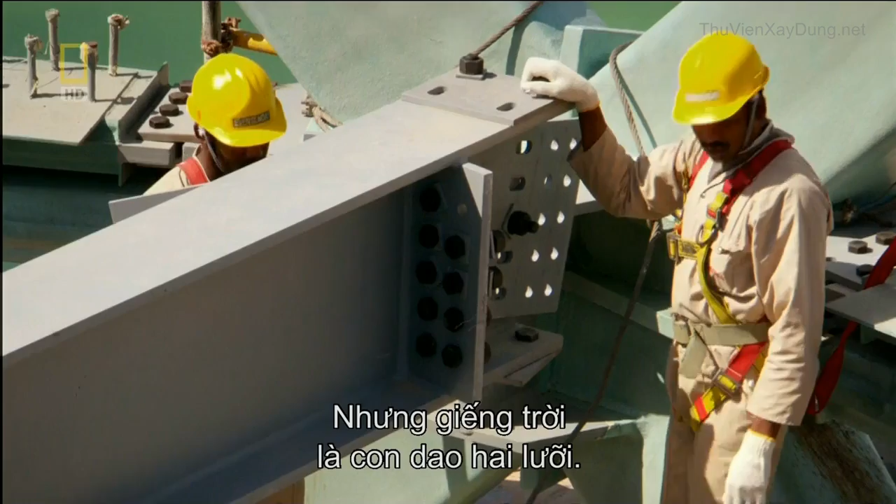But the atrium is a double-edged sword. The floors are critical in transferring loads from the diagrid to the core. A giant hole through 18 floors means these loads must find another pathway. It's a very, very big hole in every single floor plate. So our engineers really have their work cut out. You don't want to have an opening in your floor. You want to have more reinforced concrete to transfer these forces. The forces need to flow away.

And the solution is pioneering. An internal web of steel mirroring the external diagrid. This is the first time we've ever heard of this being done. The internal diagrid is actually a fundamental part of the structure. This funnel-shaped internal skeleton carries the forces of an 18-story building down to its tapered base and into the core.

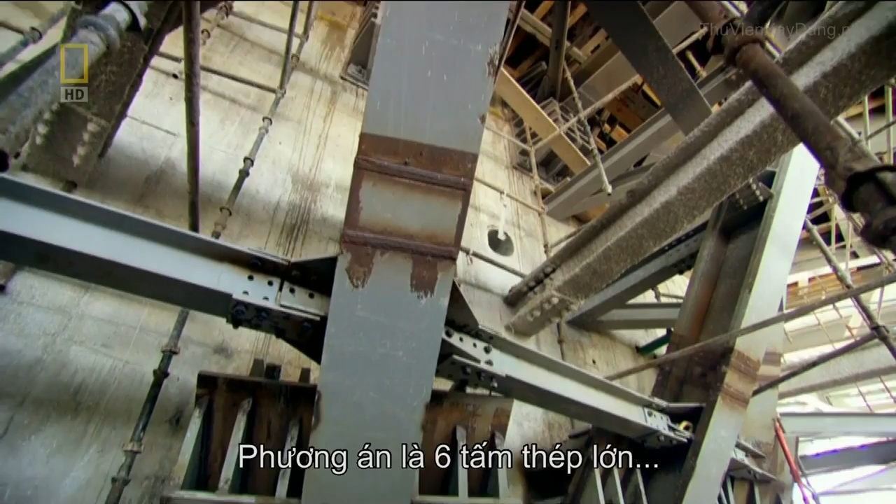But the loads are extremely high for such a small area. To stop the atrium punching through the core wall, the concrete needs protection. The answer? 6 giant plates of steel that brace the connection to the core wall. The connections are really a wonderful piece of engineering. They're 8 meters high. They span 2 floors and they connect back into the core. The atrium's near completion brings Abu Dhabi one step closer to achieving an iconic landmark.

But as the sun goes down, this isn't the only celebration underway. On site, the Indian steel team are holding an annual blessing to the Hindu god Lord Vishwakarma, the protector of architects and engineers. Their livelihoods depend on staying safe, and although they use safety equipment and are highly skilled, working with huge sections of steel at height is never risk-free.

We pay our respect to God and get the blessings from God. We do that for the safety of all our workers and for the proper completion of the job. Every trade of workers, the basic tools they are using on site, has to be kept in front of God, and the workers feel that they are in safe hands. The tools are now blessed, and the steel team's morale is high.

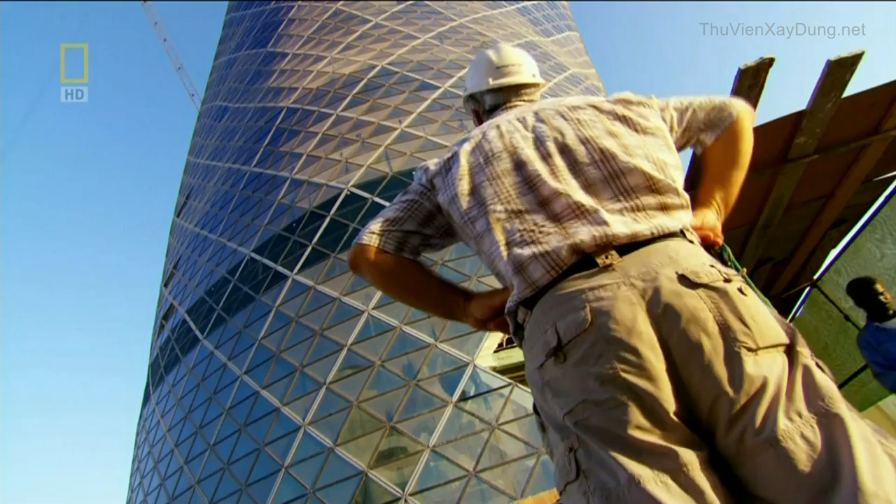But the glass installers, lifting diamonds to over a height of 100 meters, are getting the wrong kind of lift from Abu Dhabi's highly unpredictable wind. If the wind is too strong, then you can feel this in your hands when you hold these diamonds by rope. I always get nervous if I see the panel starting turning, and this makes me always a little bit afraid when I see diamonds going up and starting moving. Meyer has to act quickly, or this 4-ton diamond could smash into the building.

Not for the first time, lifting glass is delayed by changeable weather. At this rate, Meyer won't install the remaining 107 panels in time. But Abu Dhabi's wind isn't the only problem the Capital Gate team face. A last-minute design request comes in from the Sheikh's office that could have serious implications.

With just 6 months to go to completion, the Capital Gate team should be on the home straight. But those plans may have to be put on hold. I had a telephone call saying that we had to put a helipad on the roof, which I thought was a joke, but I was astounded that we got this at such a late point in the project.

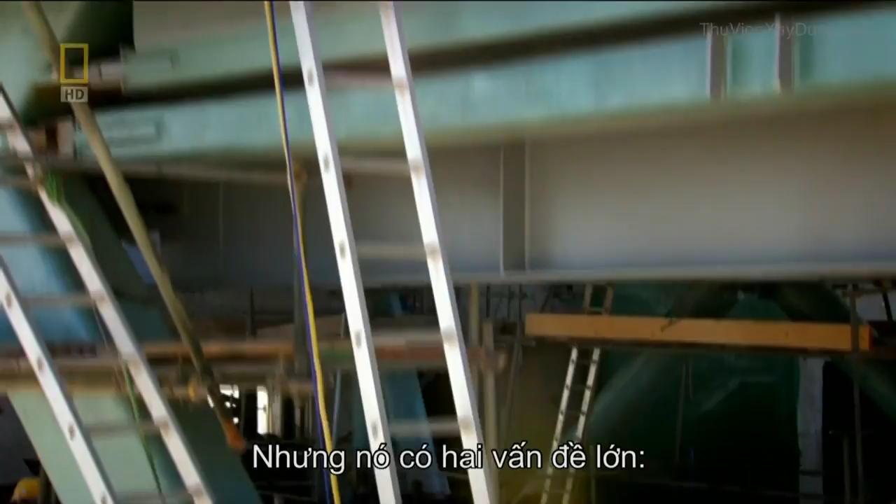Integrating what will be Abu Dhabi's highest helipad atop one of the world's most daring skyscrapers at first seems a simple request. But it actually poses 2 serious problems. It'll create new forces that must be absorbed by the already strained core, and unpredictable wind flows that can cause potentially lethal flying conditions. You get a thing called wind shear, tipping the whole helicopter onto its side, and this is a very real and very dangerous risk.

These rapid wind changes, known as wind shear, can affect the lift on helicopter blades. Aircraft can be blown off course, or literally fall out of the sky. There is no way that we could have any margin of error on the safety. The only way we could predict what the wind shear would be like on the top of the building was to model it in a wind tunnel.

In London, England, a scale model of Capital Gate is put through its paces in a high-tech wind tunnel. Just as the team fear, within seconds, wind shear conditions appear. Air currents are flowing over the top of the building, but then separate from the surface, spiraling inward to form a realm of turbulence.

Wind engineer Leighton Aurelius knows the consequences could be serious. If the pilots lose control in this random ball of energy here, they may in fact end up crashing onto the helideck, or even worse, onto the tower itself. I'm sure that can occur. But that's not all the wind tunnel test reveals.

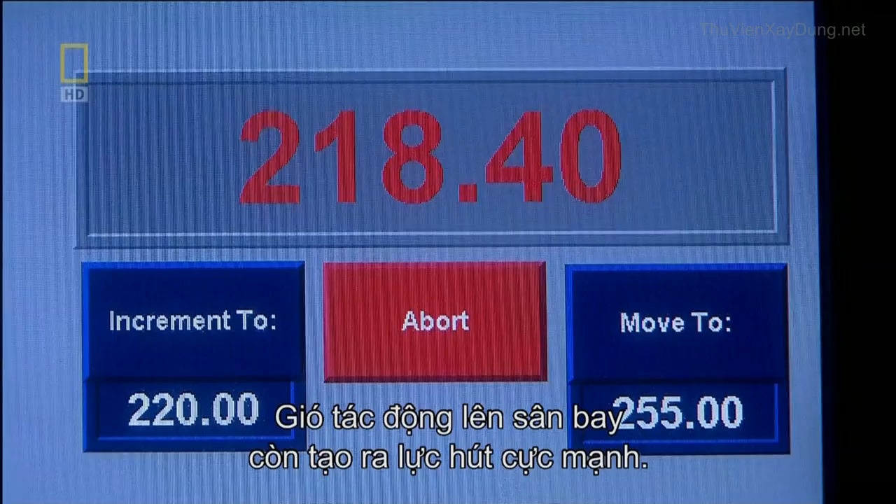Wind impacting the helipad is also creating huge suction forces. We're talking about very large forces here wanting to pull the helipad off the top of the building. Something in the realm of several large trucks or big rigs trying to pull this helipad away.

To make the helipad safe, Aurelius and his team have to go against conventional thinking. We didn't think that lowering the helipad was actually going to be the optimum design, but we see reduced loading on the helipad as well as safer conditions for the pilots to land in. Lowering the helideck to just 2 meters above the roof dramatically decreases the wind shear threat, and means Capital Gate's core will withstand the additional loads.

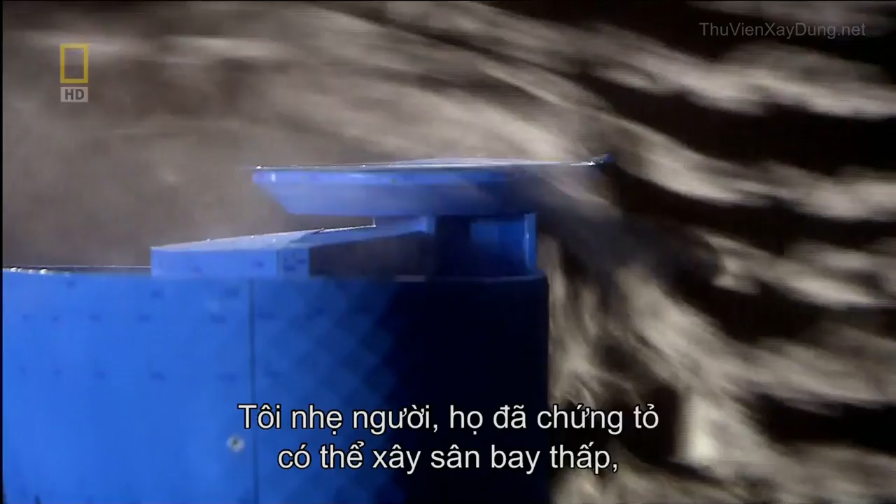We're relieved, frankly. The tests have actually confirmed now that we can have it in our original design position, which is very low, which will mean that the profile on the skyline is exactly where we want it. But it'll take another 5 months to just draw up the helipad's blueprints, and a crane must be left behind to build it.

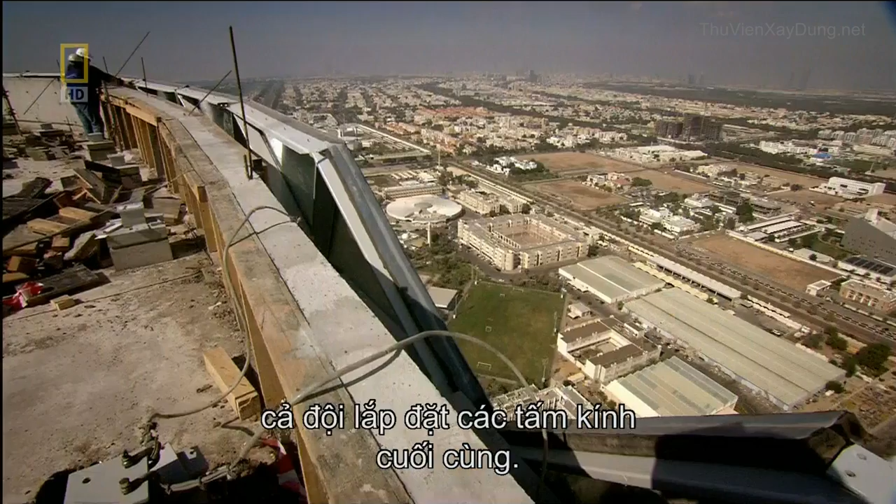Now, with only weeks to go until 0 hour, the team are installing one of the last glass panels. It's a moment that once seemed a long way off. In my office I have a plan of all the diamonds we have to install, and in the beginning it looked like I'm in jail and I'm marking the wall with marks for each day. And so at first I felt I will never finish this project. Just 10 months since the first diamond was fitted, the facade now shimmers in the sun.

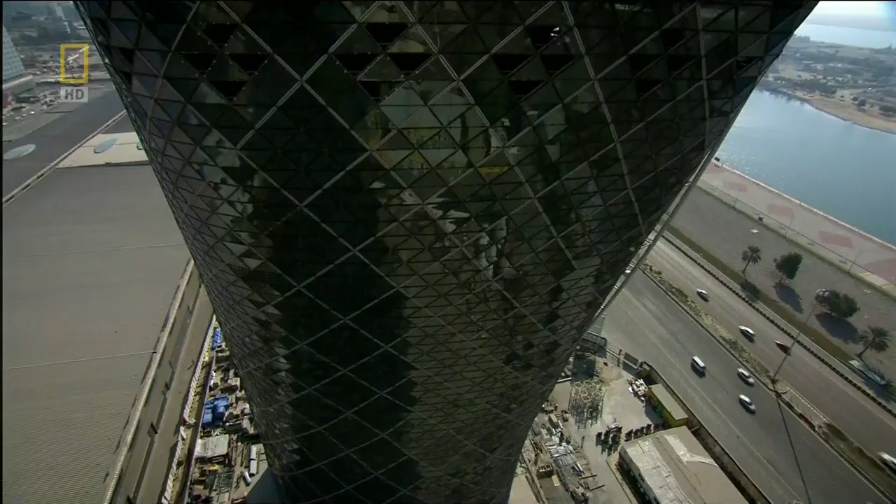Capital Gate's internal fit-out will take another year. Only then will its 5-star hotel and Abu Dhabi's most unusual office address be open for business. But against the odds, the team have created one of the most extraordinary megastructures on the planet. Capital Gate twists and spirals out of the ground, soaring to a full 160 meters. It's taken nearly 6 million man-hours to construct, and its overhang is spectacular.

You see the building and you stand underneath the overhang. It's extremely impressive. It's a fantastic feat of engineering. I feel as though I've been here an eternity, but it's probably been the quickest 2 years of my life. It's been an amazing journey and we've learned so much. And actually I think we've demonstrated that some things that looked impossible or even ridiculous were actually possible.

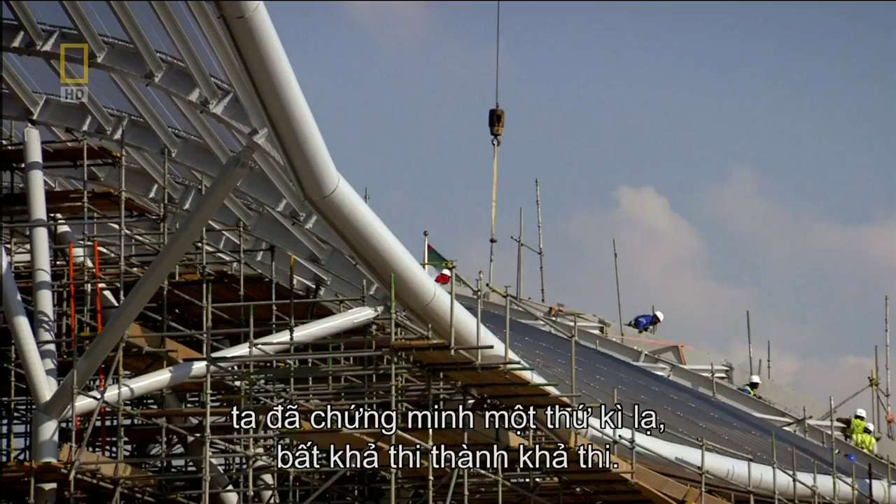And Abu Dhabi's past will soon be physically linked to its future by a wave of steel that'll rise over the grandstand and splash up the skyscraper's mirrored glass. Abu Dhabi is a fascinating part of the world to be at the moment. It says to people we can step outside of the box. We don't have to follow the rules.

With the 2010 World Future Energy Summit just weeks away, Sheikh Sultan can be sure Capital Gate will show the world what Abu Dhabi is capable of. This building is really iconic. It catches the spirit of Abu Dhabi and will be part of the postcard image of Abu Dhabi. The team have achieved what some thought was impossible. A leaning tower that claims the world record for the most inclined skyscraper on Earth.